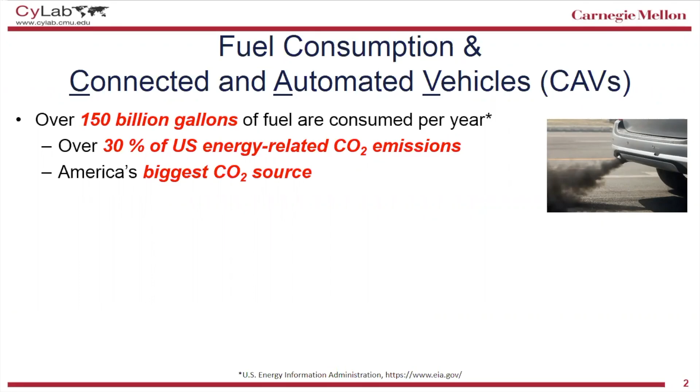Let me start from the motivation first. According to the US Energy Information Administration, over 150 billion gallons of fuel are consumed in the US every year, and over 30% of US energy-related CO2 emissions come from these ground vehicles. In fact, each country and many companies are trying to reduce CO2 gas emission.

At the same time, connected and automated vehicles, also called CAVs or self-driving vehicles, are rapidly studied, and we expect a variety of energy-saving applications such as intersection connectivity, platooning, and eco-driving strategies. For example, if vehicles get the traffic light information before approaching the intersection, by using intersection connectivity and vehicular communications, the vehicle is able to save energy. Based on these applications, automated vehicles have great potential to improve fuel efficiency.

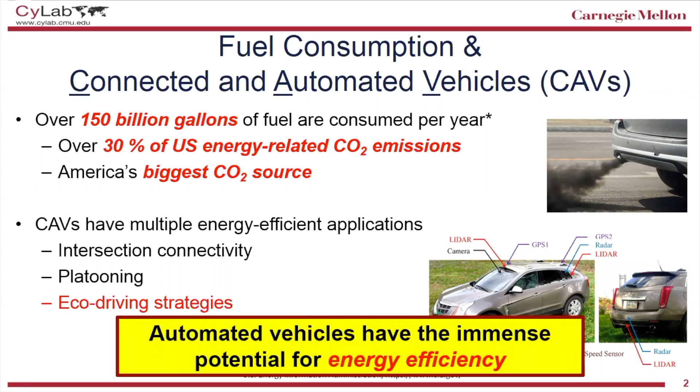In fact, as a part of the US DOE, Department of Energy, ARPA-E NEXTCAR program, General Motors and Carnegie Mellon University design and develop InfoRich eco-autonomous driving strategies, which include eco-approach, eco-departure, and eco-cruise. For example, in eco-approach, as shown in this figure, when the vehicle knows the stop in advance, the vehicle can proactively engage in coasting and save fuel energy.

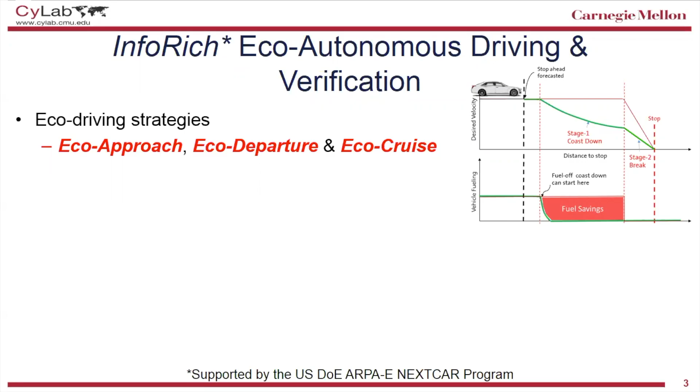This is done by incorporating static and dynamic data, including map database, preloaded vehicle data, onboard sensors, and V2X vehicle-to-everything communications. For example, by using the map database, the vehicles always know the grade and curvature for the upcoming trajectory and determine the behaviors based on it.

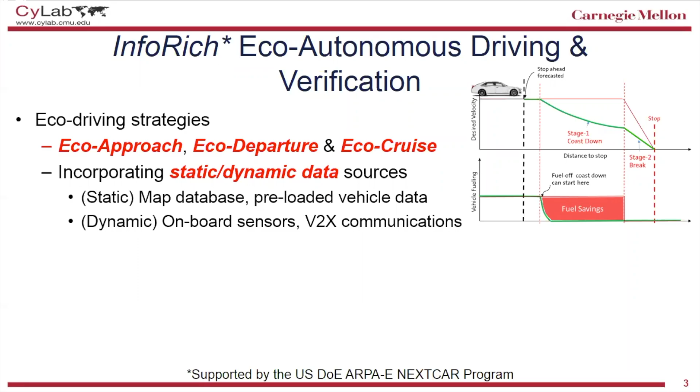However, to design and develop eco-driving technologies for CAVs, self-driving vehicles, test and verification are very important, but at the same time very difficult due to safety, cost, and repeatability. For example, misbehavior on public roads can lead to vehicle collisions or accidents. Also, CAV experiments spend much time and human resources.

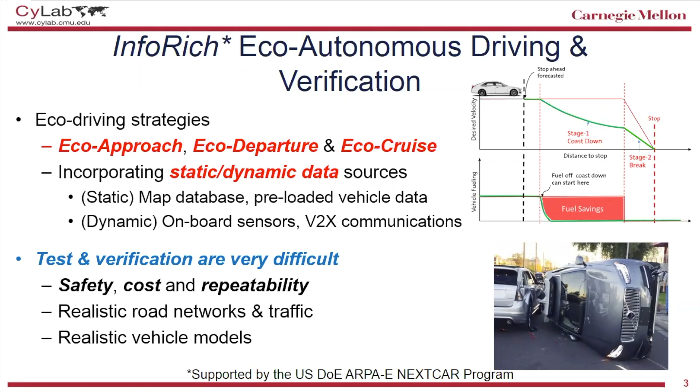In addition, traffic situations on public roads keep changing in the real world, and that is why a comprehensive study may be difficult. Therefore, in this work, we design and develop realistic simulation environments that provide realistic road networks and realistic traffic.

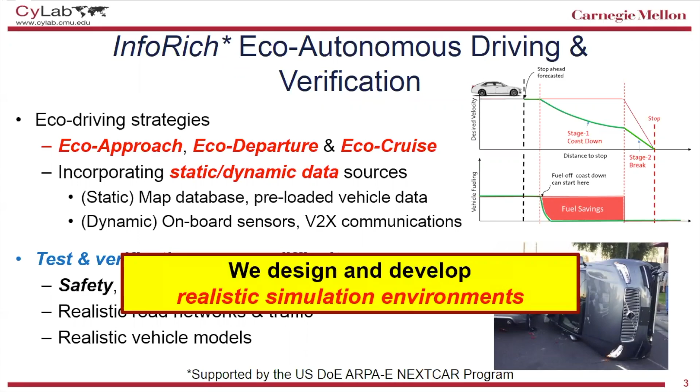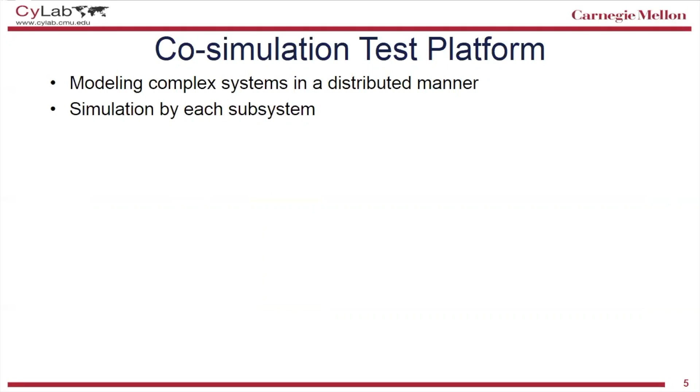First of all, co-simulation is a promising technique to model complex and dynamic systems in a distributed manner and to simulate each subcomponent without being aware of the entire system. Let me introduce our co-simulation platform here. To test and design the eco-autonomous driving strategies, we developed the co-simulation platform that includes a traffic environment simulator, an eco-autonomous driving system, which is named IRED, InfoRich Eco-Autonomous Driving System, and a Simulink-based vehicle model.

Here, the map database provides realistic road networks for the traffic simulator and the IRED autonomous driving system. The traffic simulator provides a sensor model, traffic model, static objects, and traffic light information. The IRED system is a hybrid emulator simulator for autonomous driving systems, and we can implement eco-driving applications on it. Also, the Simulink model provides a realistic powertrain model and vehicle dynamics model.

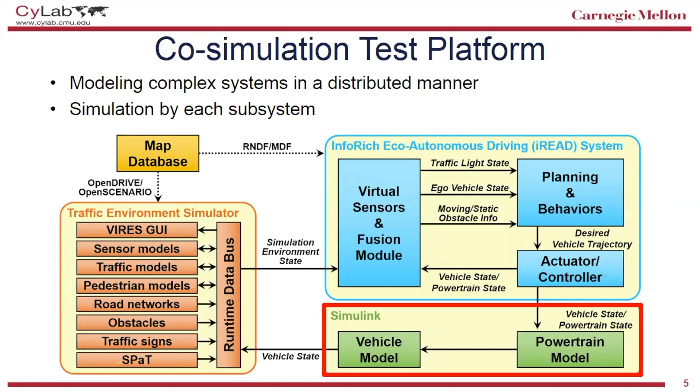By replacing this Simulink model with the vehicle hardware, we also use the platform for hardware-in-the-loop tests. These three software run simultaneously and keep exchanging data by the UDP protocol. Let us see how it works.

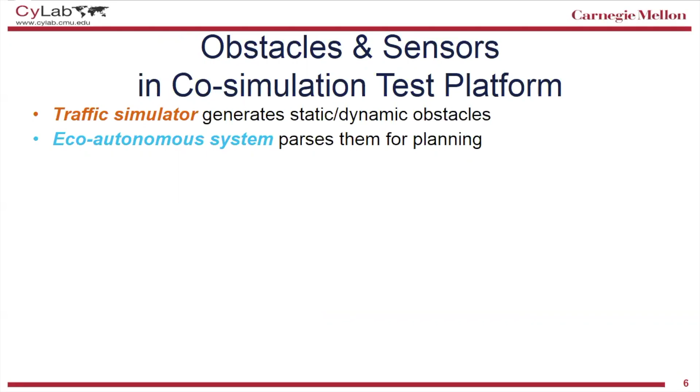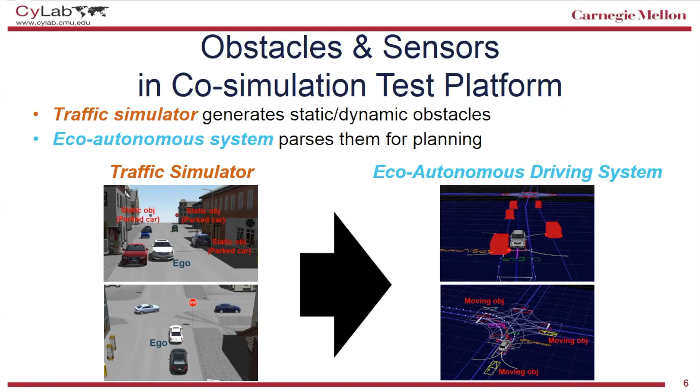Also, our system includes a variety of vehicle-specific tables, such as torque speed tables and fuel tables. These lookup tables tell you how much fuel might be consumed at the given speed and the given acceleration. By using these lookup tables, our autonomous driving systems determine the future behavior and speed trajectory.

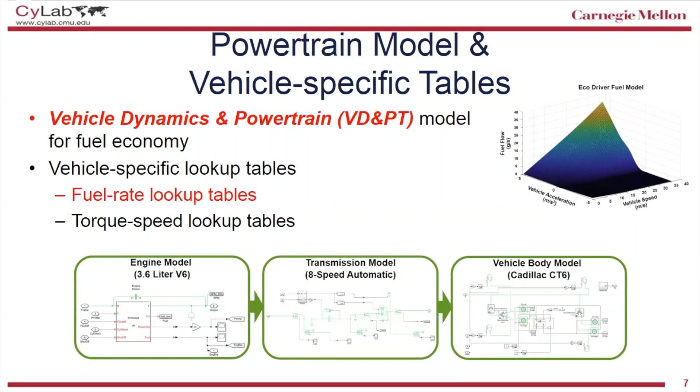Let's move to another topic, real-world driving scenarios. To test and verify our eco-autonomous driving strategies, we use realistic driving scenarios from real-world driving data. First, we use the synthetic drive cycles provided by the National Renewable Energy Lab, NREL, to get the real-world driving data, which includes a variety of information, such as grade, curvature, intersections, speed limit, and traffic controllers.

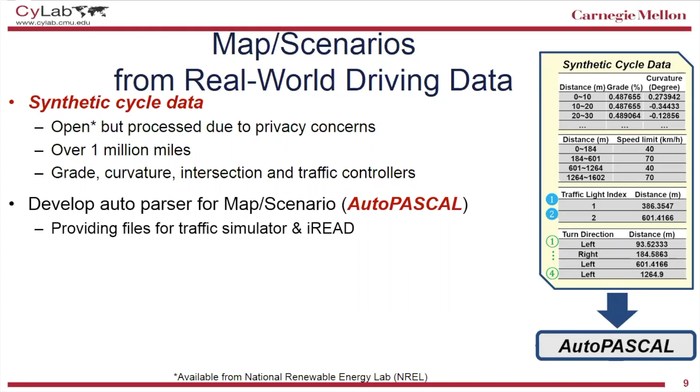However, the synthetic drives are pre-processed for privacy concerns and represented in CSV table format like the right figure. Therefore, we developed an auto parser and calculator for map and scenario, named AutoPASCAL, to reconstruct the road networks from the synthetic cycles. This tool provides the map and scenario files for the traffic simulator and for the eco-autonomous driving system, iREAD.

Here is one example of road networks. By using the data in the synthetic cycles, AutoPASCAL processes and generates the road networks. Traffic light information and turn direction information are used for determining the location of intersections, and also each road segment can be developed with curvature and grade information.

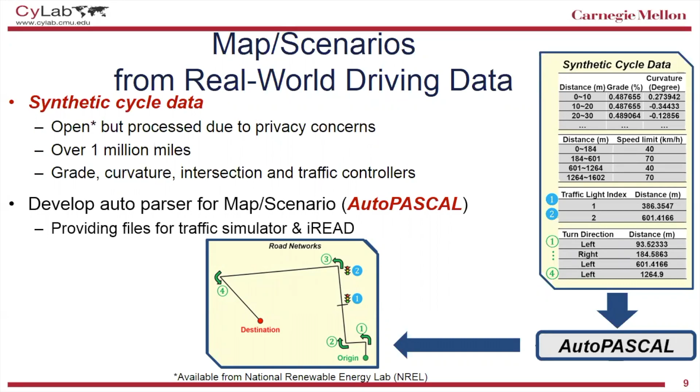Let's see the driving scenarios used in the co-simulation platform. Since the traffic simulator and the eco-autonomous driving system use different map formats, AutoPASCAL has two-step file generation like this. AutoPASCAL first generates OpenDRIVE and OpenSCENARIO files for the traffic simulator, and then converts them into RNDF and MDF files for the eco-autonomous driving system.

By using the map generation tool, we can get these consistent maps for the traffic simulator and eco-autonomous driving system. Both road networks are developed exactly the same in different formats. They include grade and curvature information, and our eco-autonomous driving strategies account for the grade and curvature to save fuel consumption.

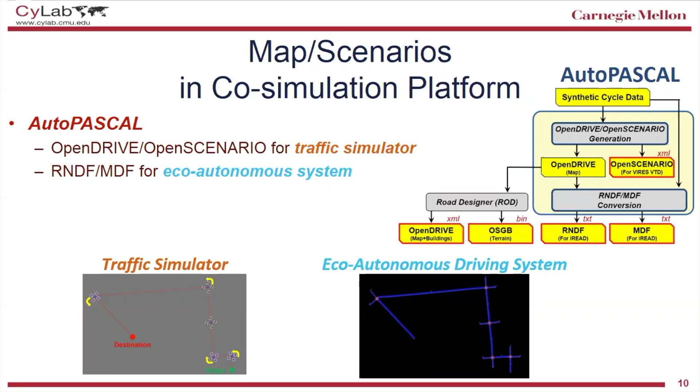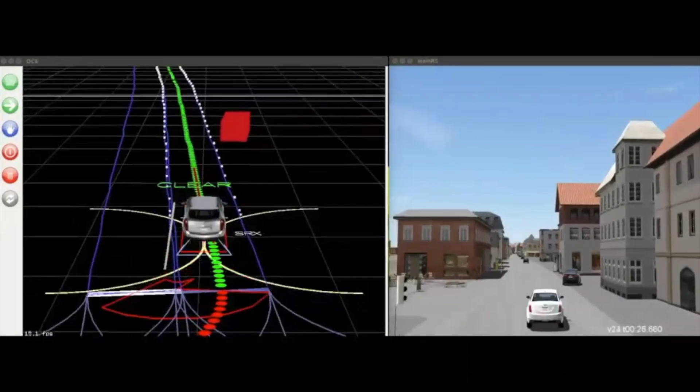This is the demo video. The left side UI is the iREAD eco-autonomous driving system, and the right one is the traffic simulator. Here, traffic controllers, static obstacles, and traffic, which means moving obstacles, are generated in the right side traffic simulator, and the left side eco-autonomous driving system subscribes to this information for planning and determining its behaviors. These two software run simultaneously and keep exchanging data between them.

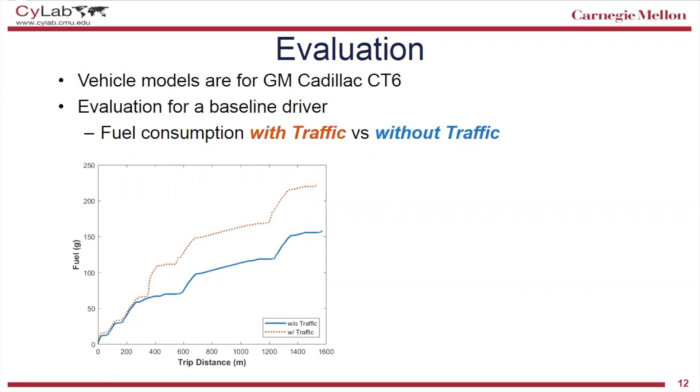Here is a concise evaluation for the baseline driver with and without traffic. Since this is a test of the simulation environment itself, we didn't evaluate the eco-driving strategies here. Here are the fuel consumption results for one trip, which is around 1.6 kilometers. The x-axis describes the trip distance and the y-axis represents the consumed fuel. The blue line is the performance without traffic and the orange broken line is with traffic.

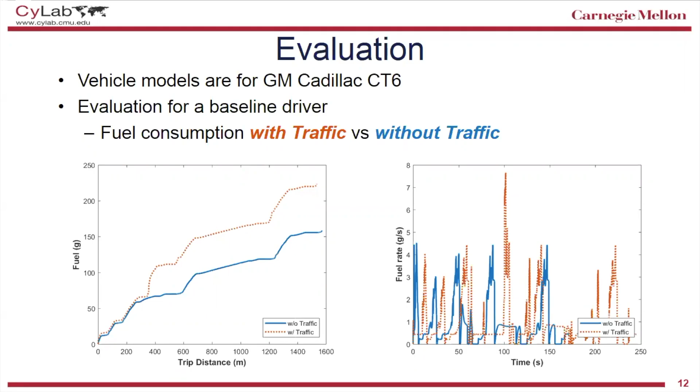To wrap up, in this talk, we presented the co-simulation test platform to test, verify, and validate energy-efficient driving strategies for connected and automated vehicles. Also, to run the simulation in realistic driving scenarios, we presented the synthetic scenarios and the map tool named AutoPASCAL to parse and reconstruct the road networks from driving data.

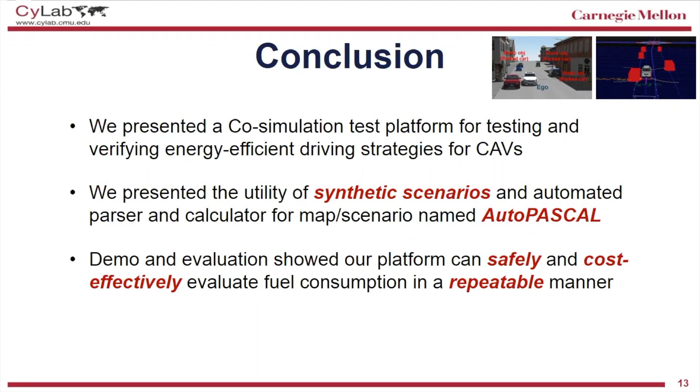Finally, we showed the demo video and evaluation for the co-simulation and showed that our platform is able to safely and cost-effectively evaluate fuel consumption in a repeatable manner. Based on the practical co-simulation platform, we will design a variety of eco-driving technologies for connected and autonomous vehicles.